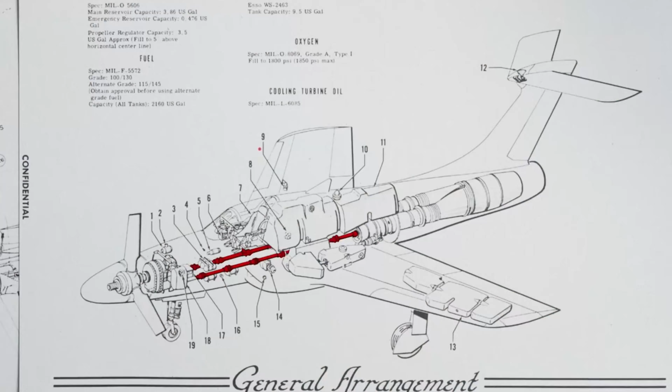The noise was so intense that it caused severe nausea and headaches, and in one documented case, triggered a seizure in an engineer exposed to its full force, powered by a massive 5,850 HP turboprop engine with afterburner capability.

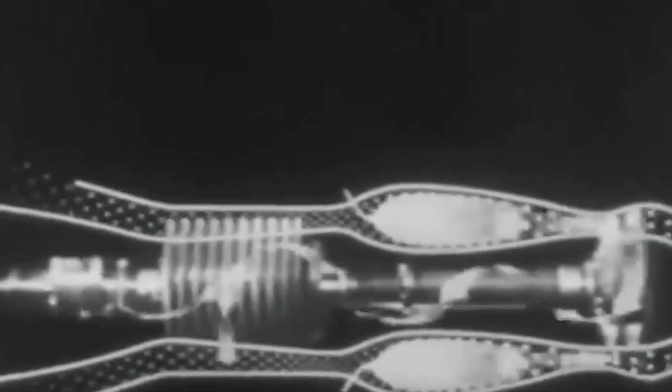The XF-84 represented an ambitious leap in aviation engineering. However, despite its impressive specifications and innovative design features, including a 12-foot diameter propeller with 3 steel blades, the aircraft's operational history was remarkably brief.

The 2 prototypes completed only 12 test flights, accumulating less than 7 hours of total flight time before the project's cancellation in 1956. This video will explore the fascinating engineering journey of the Thunderscreech, from its ambitious design goals to the technical challenges that ultimately led to its downfall.

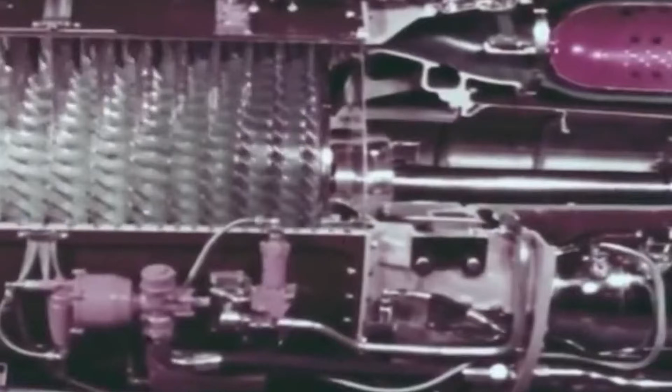The birth of the XF-84 Thunderscreech project. The 1950s marked an unprecedented period of aviation advancement as the industry emerged from World War II as the largest manufacturing sector in the United States.

During the 62 months between July 1940 and August 1945, American manufacturers produced nearly 300,000 aircraft, establishing a foundation for post-war innovation.

The aviation landscape underwent a significant transformation after World War II. The military services were reorganized in 1947, establishing the United States Air Force as a separate service. Furthermore, the industry faced mounting pressure to develop aircraft combining the emerging capabilities of jet engines with traditional propeller-driven benefits.

Republic Aviation launched Project 3347 in response to these evolving needs. Initially designated as the XF-106, the project was subsequently renamed to XF-84 to maintain its connection with the F-84F Thunderstreak lineage. The development marked a bold effort to design an aircraft capable of achieving several seemingly contradictory objectives, including jet-like performance, extended operational range, reduced fuel consumption, and lower landing speeds.

The project originated from a U.S. Navy requirement for a carrier-based fighter that could operate without catapult assistance. The Air Force's Wright Air Development Center became a key sponsor, recognizing the potential for a versatile aircraft that could serve multiple roles. The initial specifications called for an aircraft powered by a 5,850 HP Allison XT40-1 turboprop engine.

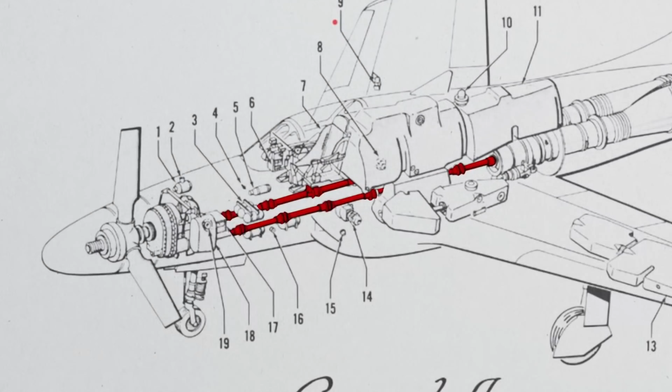Additionally, the design incorporated an afterburner capability that could increase power output to 7,230 HP. The engineering team faced the complex challenge of integrating these powerful components while maintaining stable flight characteristics.

The project's ambitious scope reflected the era's optimistic approach to technological advancement. Although the Navy initially ordered 3 prototypes, they subsequently canceled their participation, consequently transforming the remaining XF-84 prototypes into research aircraft for the Air Force's Propeller Laboratory at Wright-Patterson AFB.

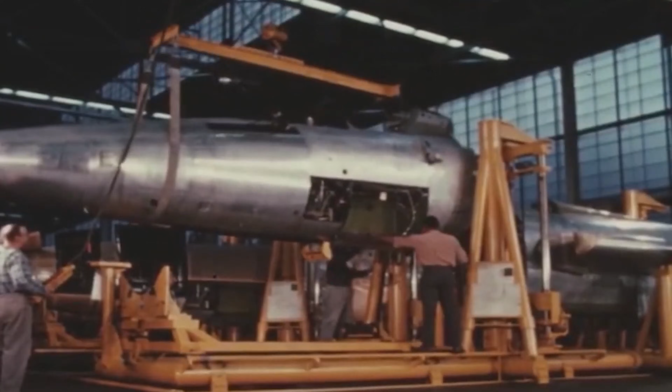Engineering marvel, the supersonic propeller design. First of all, the engineering team at Republic Aviation faced unprecedented challenges in designing a propeller that could operate efficiently at supersonic speeds. The resulting 3-bladed Aero Products propeller represented a significant advancement in aviation technology, specifically engineered to maintain stability at extreme velocities.

The engineering team created a robust propeller design with square-tipped steel blades spanning 12 feet, equivalent to 3.7 meters in diameter. These blades feature thin profiles optimized for supersonic speeds and were constructed from specialized high-strength steel capable of withstanding immense rotational forces, with a tensile strength rated at 180,000 pounds per square inch.

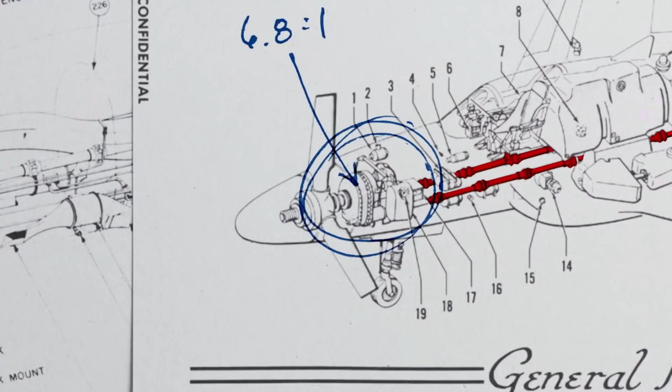The propeller's thrust control system operated through an innovative variable pitch mechanism. Accordingly, the blade pitch could be adjusted while maintaining a constant rotational speed of 2,100 rpm. This design choice enabled precise thrust control without altering the engine's power output.

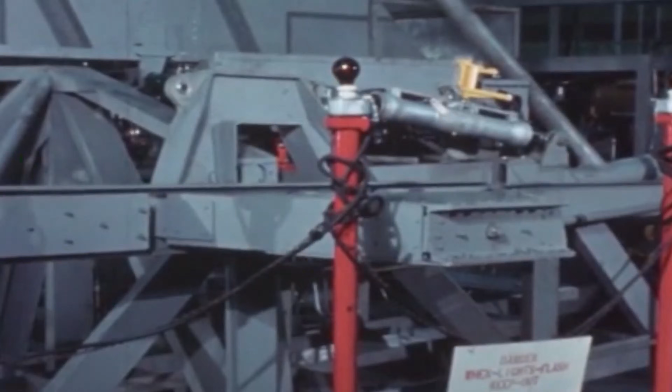The blade design demanded a precise balance among competing factors, guided by a specialized table of specifications. The blade tips were designed to achieve a velocity of Mach 1.18 to maximize thrust generation, while the chord design incorporated a wide chord, low aspect ratio configuration to ensure stability at supersonic speeds. Additionally, the blade profile featured extremely thin sections to minimize shock formation.

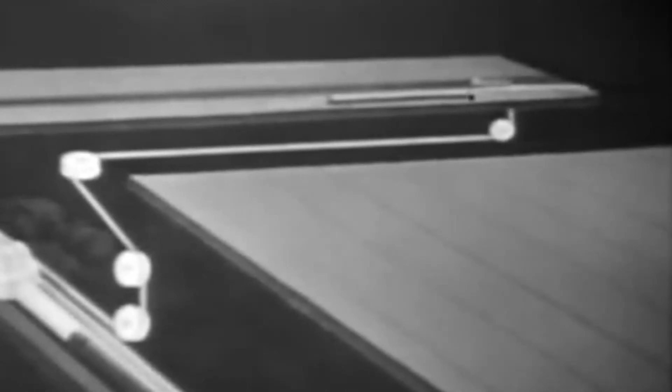Moreover, the engineering team incorporated advanced aerodynamic principles to address the challenges of supersonic propeller operation. The blade sections were designed to maintain optimal lift-drag ratios at high speeds. Therefore, each blade segment operated at carefully calculated angles to maximize efficiency while minimizing the formation of shock waves. The design process required extensive analysis of blade section, interference, and shock field interactions at supersonic speeds.

The engineering team achieved remarkable results, with theoretical calculations suggesting potential efficiency rates of 70% at tip Mach numbers reaching 2.3. Power system integration: at the heart of the XF-84H lay an innovative power system built around the Allison XT40-A-1 turboprop engine.

This power plant represented a significant departure from conventional designs, particularly in its unique configuration and integration challenges.

The XT40-A-1 engine represented a groundbreaking innovation in aviation propulsion, showcasing a revolutionary design that paired two T38 gas turbine power sections mounted side by side. This unique dual turbine configuration produced an extraordinary 5,850 shaft horsepower, positioning it as one of the most powerful engines of its time. Each T38 turbine was equipped with a highly efficient 19-stage axial flow compressor, contributing to the engine's remarkable performance capabilities.

Additionally, the XT40-A-1 delivered 1,296 pounds of jet thrust, while maintaining a total weight of 2,860 pounds, reflecting its sophisticated and efficient engineering. A particularly notable feature of this engine was its integrated afterburner capability, designed to further enhance its output to an impressive 7,400 horsepower. However, this feature, despite its potential, was never subjected to flight testing. The XT40-A-1 thus stood as a testament to advanced engineering, blending innovation and performance in a compact, high-powered design.

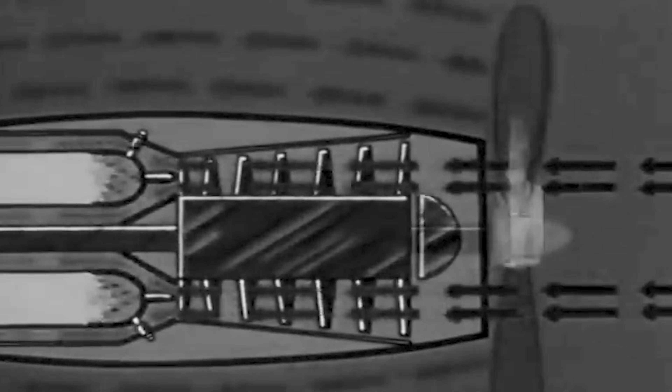The power system's integration challenges ultimately proved insurmountable. The combination of mechanical difficulties with the prop pitch gearing and severe vibrations generated by the lengthy propeller shafts led to persistent reliability issues. These technical hurdles, rather than any single catastrophic failure, contributed significantly to the project's eventual termination.

Technical specifications and performance. The Republic XF-84H Thunderscreech represented a remarkable combination of size and power specifications that set it apart from conventional aircraft of its era. First of all, the aircraft's physical dimensions were carefully engineered to balance performance with practical operational requirements. The XF-84 was a sizable aircraft, with a length of 51 feet 5 inches, a wingspan of 33 feet 5 inches, and a height of 15 feet 4 inches.

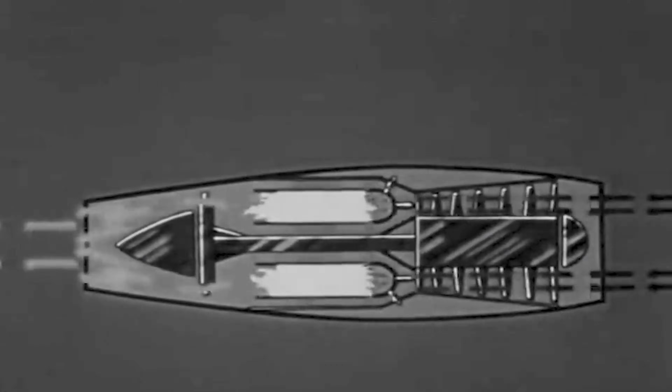Its wing area measured 331.0 square feet, providing ample surface area for lift generation. Notwithstanding its substantial size, the aircraft maintained a relatively efficient weight distribution. The empty weight stood at 17,892 pounds, as a result of careful material selection and structural engineering. At maximum capacity, the gross weight reached 27,046 pounds.

The speed and altitude capabilities of the XF-84 reflected a blend of ambition and compromise, as its actual performance did not fully align with its designers' lofty expectations. Republic Aviation initially predicted a maximum speed of 670 miles per hour, which would have secured its position as the fastest propeller-driven aircraft ever constructed. However, real-world performance testing revealed a maximum speed of 520 miles per hour, falling significantly short of that anticipated figure. This discrepancy highlighted the challenges of pushing the boundaries of propeller-driven flight at near transonic speeds.

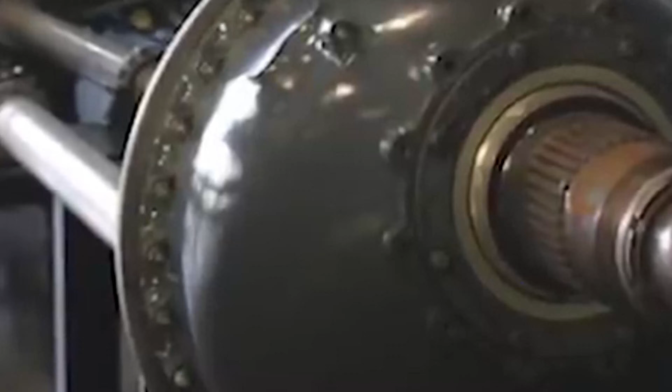While its speed capabilities were underwhelming, the XF-84 demonstrated noteworthy performance in terms of altitude. It achieved a service ceiling of 40,000 feet, showcasing its ability to operate effectively at high altitudes. Additionally, the aircraft boasted a robust rate of climb, capable of ascending 5,000 feet per minute, underscoring its impressive vertical performance. These attributes reflected the advanced engineering that went into its design, even if the aircraft did not achieve the groundbreaking speeds originally envisioned.

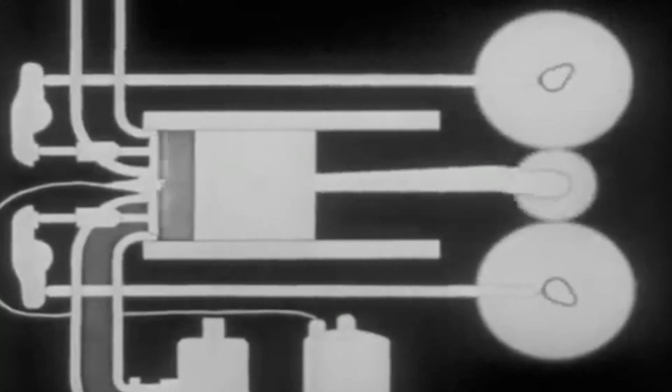The XF-84's operational range exceeded 2,000 miles, marking a significant achievement in terms of fuel efficiency for its era. This extended range capability aligned with the original project goal of combining jet fighter performance with propeller-driven efficiency. The Allison XT40-A-1 turboprop engine, rated at 5,850 horsepower, theoretically offered the potential for increased power output to 7,400 HP with afterburner engagement. Ultimately, the afterburner capability remained untested during flight operations, leaving questions about potential performance improvements unanswered.

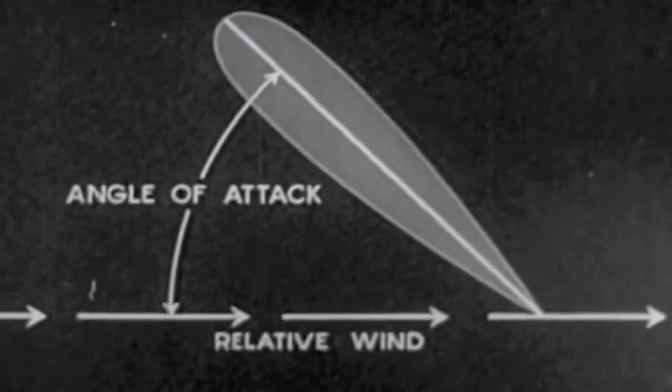The thrust-to-weight ratio of 0.66 highlighted the aircraft's unique position between conventional propeller-driven aircraft and pure jet fighters. This characteristic underscored the experimental nature of the project and its attempt to bridge the gap between traditional and emerging aviation technologies.

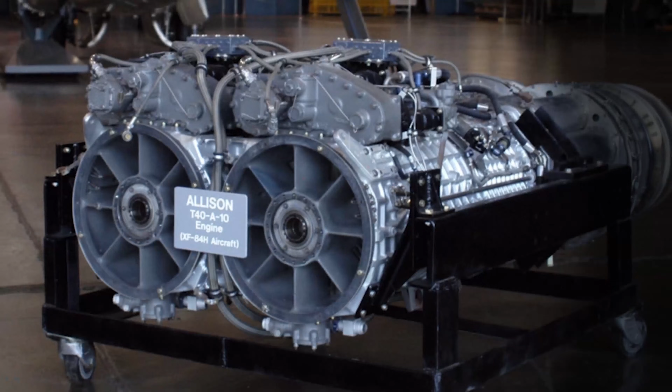The Republic XF-84's most distinctive characteristic was its extraordinary sound generation capabilities. The aircraft's unique acoustic signature stemmed from its revolutionary propeller design, which created unprecedented sound phenomena in aviation history.

The supersonic propeller tips, rotating at Mach 1.18, generated a continuous sonic boom that radiated laterally from the propellers for hundreds of yards. The outer 24 to 30 inches of the propeller blades maintained supersonic speeds even during idle thrust. The constant supersonic rotation of the propeller generated a distinctive sound pattern, characterized by lateral radiation from the blades.

This powerful noise was audible over an impressive range, reaching up to 25 miles. The propeller tips reached speeds of Mach 1.18, with the outer 61 to 76 centimeters of the blades operating in the supersonic range. This combination of speed and sound propagation contributed to the aircraft's highly unique acoustic signature.

In addition to the primary sonic boom, the aircraft generated complex sound patterns from multiple sources. Notably, no official decibel measurements were ever recorded.

As test pilot Henry Beaird remarked, "Nobody ever actually recorded the decibels. I think they were afraid the measuring device might get broken."

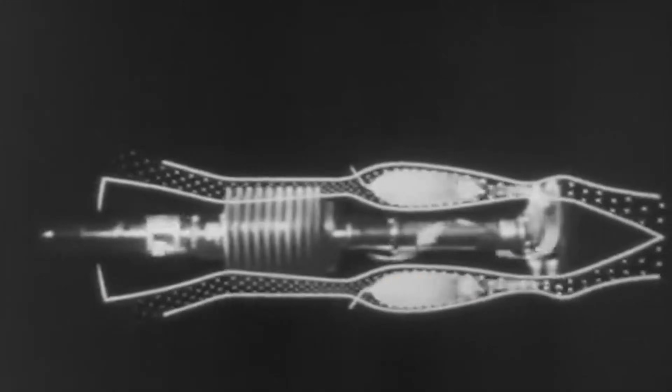The sound intensity of the aircraft was driven by three main factors: the shock waves produced by the supersonic propeller tips, the noise generated by the subsonic sections of the blades, and the combined sound output from the dual turbine sections. The sound effects on ground personnel were so severe that they necessitated substantial operational adjustments.

The intense noise caused physical issues such as severe nausea and headaches among ground crews, with some individuals even experiencing seizures due to prolonged exposure.

The vibrations generated by the sound posed a risk of damaging sensitive control tower components, while the overwhelming noise made it impossible to maintain standard communication protocols.

The sound intensity became so problematic that Edwards Air Force Base implemented extraordinary measures. Base personnel resorted to using signal flags and lights for communication.

Ultimately, after numerous complaints, the Air Force Flight Test Center mandated the aircraft's relocation to Rogers Dry Lake, far from the flight line, for engine testing.

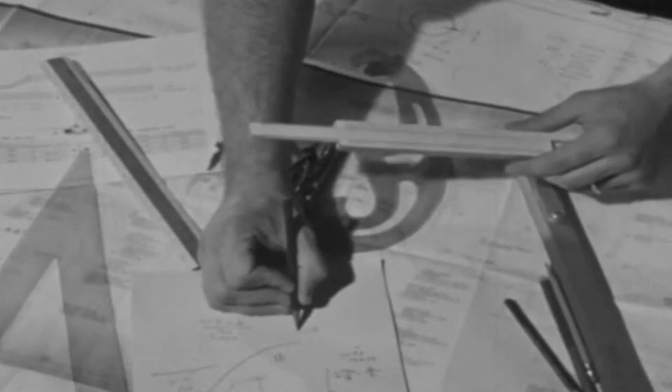One particularly notable incident involved a C-47 crew chief who was severely incapacitated during a 30-minute ground run while inside his aircraft. The shock waves proved powerful enough to physically knock down personnel who ventured too close to the propeller's plane of rotation.

The sound phenomenon fundamentally altered standard operating procedures at Edwards AFB. The control tower staff faced potential damage to sensitive equipment, forcing them to develop alternative communication methods with ground crews. This unprecedented situation highlighted the practical limitations of operating such an acoustically intense aircraft within standard military facilities.

The flight testing program of the XF-84 began after its transportation via rail from Republic's Farmingdale plant to Edwards Air Force Base. The program would ultimately prove to be one of the shortest yet most eventful in experimental aircraft history. Ground testing revealed immediate challenges that would plague the entire program.

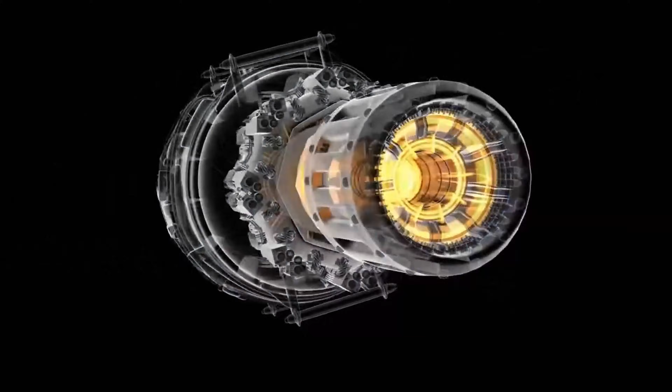The aircraft required an extensive 30-minute warm-up period before each flight, creating significant operational limitations. The ground crews faced unprecedented difficulties, primarily due to the intense sonic effects that disrupted normal base operations.

The XF-84 made its historic first flight on July 22, 1955, marking the beginning of an ambitious testing program. Throughout the testing phase, a total of 12 flights were conducted, accumulating 6 hours and 40 minutes of flight time.

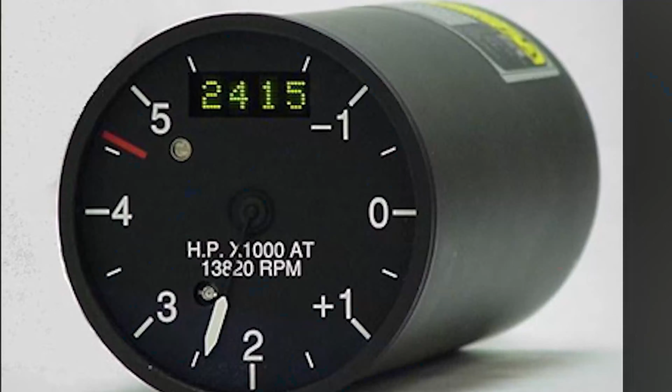However, despite the aircraft's potential, the results were far from ideal. Out of the 12 flights, only one was considered a complete success, illustrating the significant challenges faced by the testing team. The two prototypes had different flight distributions, with Prototype 1 completing 8 flights and Prototype 2 finishing 4.

The testing phase uncovered some critical issues that severely hindered the aircraft's performance. One of the major problems was persistent mechanical failures in the propeller pitch gearing, which directly impacted the aircraft's ability to maintain stable performance. Additionally, the XF-84 suffered from severe airframe vibrations that further complicated its handling and reliability.

Frequent engine malfunctions also plagued the aircraft, preventing it from reaching its full potential during flight. Lastly, the aircraft exhibited unstable longitudinal control.

These challenges made the aircraft difficult to manage and navigate under certain conditions, highlighting the difficulties in achieving the ambitious design goals set for the XF-84 despite its groundbreaking engineering.

Two test pilots, Hank Beard and Lin Hendrix, undertook the challenging task of flying the Thunderscreech. Beard conducted 11 of the 12 test flights, yet 10 of his flights concluded with forced landings.

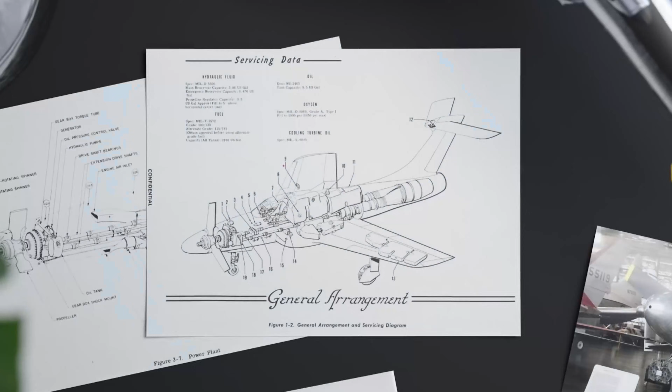The aircraft's performance limitations became evident when it demonstrated an unhappy practice of snaking at speeds above 450 knots, indicating serious longitudinal stability issues.

Lin Hendrix' experience proved notably dramatic. After his single flight attempt, he famously declared to Republic's chief engineer, 'You aren't big enough, and there aren't enough of you to get me in that thing again.' His refusal to conduct further flights stemmed from the aircraft's dangerous handling characteristics at higher speeds.

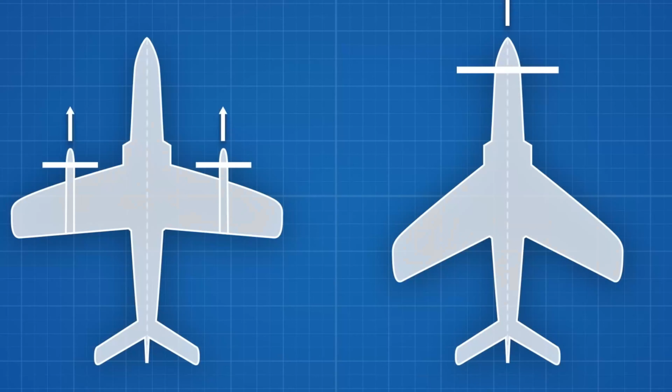The testing program never progressed beyond the manufacturer's phase of approving flights. The Air Force Flight Test Center, recognizing the mounting technical challenges, directed Republic to conduct engine runs far from the flight line on Rogers Dry Lake.

Yet these precautions did little to salvage the program's viability. The combination of mechanical failures, control issues, and operational impracticality led to the program's termination in September 1956. The aircraft's inability to reach its design speeds, coupled with persistent stability problems, demonstrated that the ambitious concept of a supersonic propeller-driven fighter had reached its practical limits.

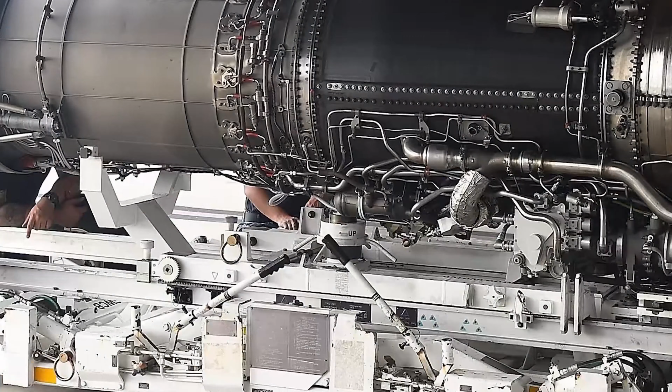Throughout the XF-84's development, Republic Aviation implemented numerous engineering modifications to address the aircraft's inherent challenges. These changes ranged from fundamental structural alterations to innovative system implementations, each aimed at improving the aircraft's performance and operational capabilities. The engineering team made several critical modifications to counter the intense torque generated by the supersonic propeller.

Notably, they raised the horizontal tail surfaces to a position atop the tail fin, ensuring clearance from the devastating prop wash effects. A distinctive triangular shark fin was installed behind the cockpit to enhance stability during flight operations.

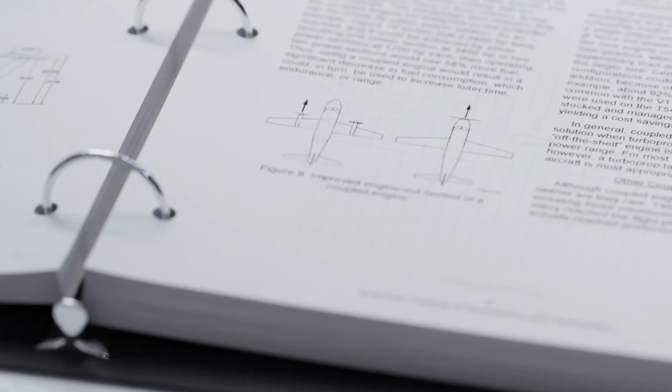Several structural modifications were made to address the aircraft's performance issues. The left leading edge intake was extended 12 inches forward compared to the right side to improve airflow and balance. Additionally, differential operation capabilities were introduced for the left and right flaps, allowing for more precise control. To further enhance the aircraft's stability and handling, a T-tail configuration was implemented, providing improved control surfaces.

Efforts to reduce the aircraft's notorious noise issues were a primary focus for engineers, who implemented a series of strategies aimed at mitigating the acoustic impact. One of the most significant areas of modification was engine placement, to minimize the disruptive effects on ground personnel and surrounding infrastructure. While this modification did help reduce some of the noise experienced on the ground, its success was limited, as the aircraft still produced a substantial sound level during operation.

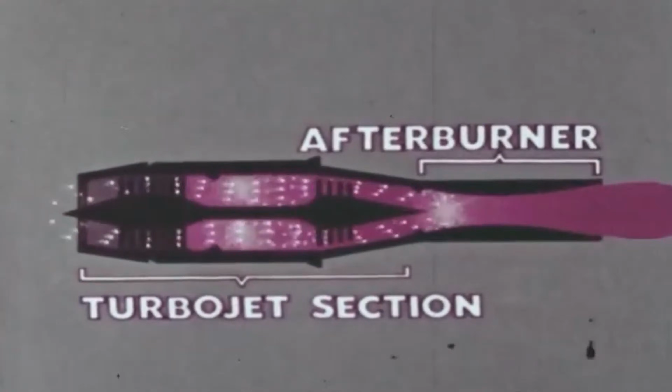In addition, efforts were made to reduce base disruption by relocating the aircraft's operations to Rogers Dry Lake, a more remote area that allowed for flight testing with less impact on populated regions. While this move helped lessen the effects on the immediate surroundings, it did not fully resolve the noise problem.

Another key aspect of the noise reduction strategy involved optimizing the blade configuration to improve the sonic characteristics of the propeller. Engineers tested multiple designs in an attempt to refine the blade's shape and minimize the intense noise generated by supersonic rotation. Despite these efforts, the aircraft continued to present significant challenges in achieving a level of noise control that would make it suitable for regular operation.

The engineering team introduced several innovative features to enhance the aircraft's capabilities. Among these was the pioneering implementation of a retractable ram-air turbine designed to deploy automatically whenever the landing gear extended. This system proved invaluable, providing crucial electrical and hydraulic power during the frequent engine failures that plagued the aircraft.

Meanwhile, the integration of an afterburner system aimed to boost the engine's output from 5,850 HP to 7,400 HP. This modification, theoretically, would have enabled supersonic flight with the propeller in a feathered position. Ultimately, the program concluded before the afterburner could be tested in flight.

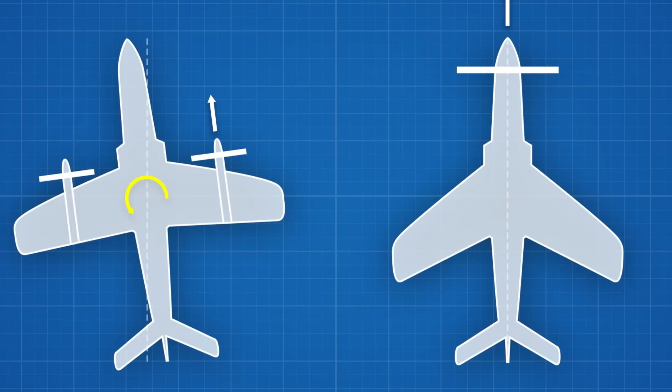The engineering team tackled multiple mechanical challenges concurrently, focusing on improving key systems. In the case of the propeller pitch control system, they implemented advanced gearing mechanisms and modified the control systems to enhance reliability. Additionally, safety features were incorporated to better handle emergencies, ensuring the aircraft could be managed in critical scenarios.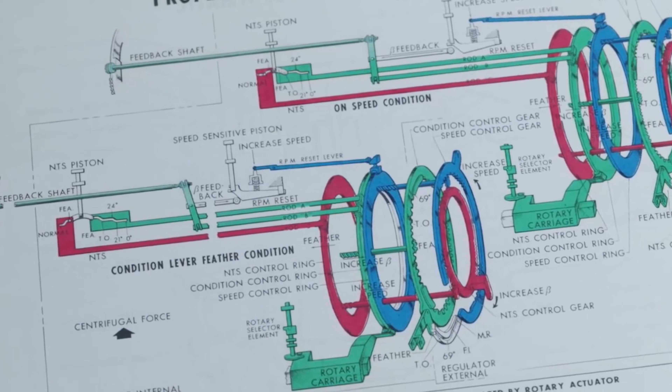Meanwhile, the drive system underwent significant modifications, including reinforcing the 18-foot-long propeller shafts and refining the gearbox design.

The modifications, while innovative, faced persistent challenges. The aircraft continued experiencing severe vibrations at speeds exceeding 450 mph. These vibrations, originating from the propeller shafts, created cascading effects throughout the airframe. The engineering team's efforts to resolve these issues through structural reinforcement and system optimizations proved insufficient to overcome the fundamental design limitations.

The extensive modifications required for operational capability highlighted the project's inherent complexities. Each improvement attempt revealed new challenges, creating a cycle of continuous engineering adjustments.

The aircraft's mechanical difficulties persisted, with 11 out of its 12 test flights ending in engine failures, underscoring the limitations of the available technology and engineering solutions of that era.

Project termination and lessons learned. In September 1956, the United States Air Force officially terminated the XF-84 Thunderscreech program, marking the end of an ambitious yet troubled chapter in aviation history. The project's conclusion stemmed from a combination of insurmountable technical challenges and operational limitations that proved too significant to overcome.

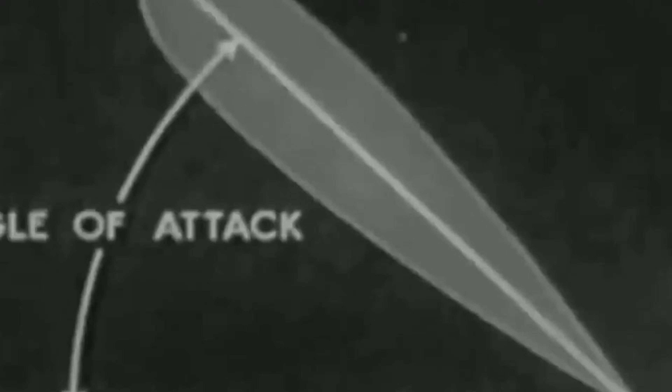The operational assessment of the XF-84 revealed substantial drawbacks that outweighed its potential benefits. Primarily, the aircraft's extensive maintenance requirements and poor reliability made it impractical for military service. Several factors led to the aircraft's unfavorable evaluation. The extended preparation time, which conflicted with the need for rapid deployment, proved to be a significant drawback.

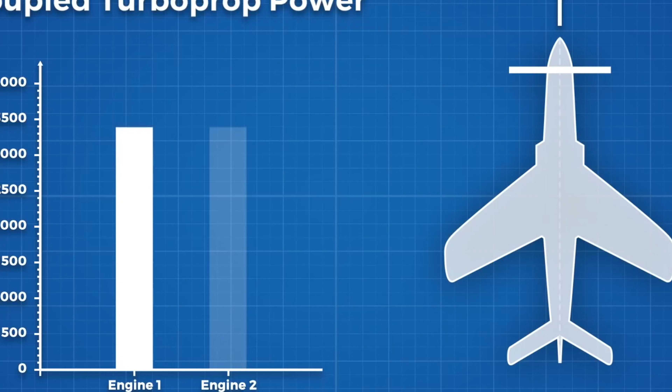Additionally, the high maintenance demands placed a strain on operational costs, as frequent repairs were necessary due to persistent mechanical issues. Furthermore, safety concerns for ground personnel, stemming from the aircraft's intense noise and vibrations, limited its operational flexibility and further hindered its practicality in real-world scenarios.

Notably, the XF-84's project, despite its shortcomings, contributed valuable insights to aviation technology. The program led to several significant advancements in aviation technology. It marked the first use of a ram air turbine system on an aircraft, a pioneering development at the time. The advanced air brake design, developed for the XF-84, was later adapted for use on the F-105 Thunderchief, contributing to improved performance in subsequent aircraft.

Additionally, the program provided groundbreaking research in supersonic propeller technology, offering valuable insights into the challenges of operating at such high speeds. The program also generated crucial data on noise suppression and vibration control, which would influence future aircraft designs and operational strategies. Undeniably, the project's technical challenges provided crucial lessons for future aircraft development. The engineering team's experience with supersonic propeller design and noise management informed subsequent aviation projects.

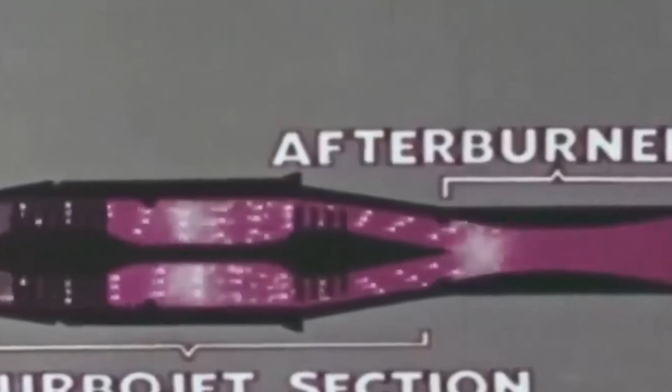The aircraft's limitations demonstrated the practical boundaries of propeller-driven fighter technology. The program's termination influenced the Pentagon's strategic direction as they permanently moved away from propeller-driven fighters. This decisive shift toward jet propulsion marked a turning point in military aviation development. The XF-84's legacy serves as a reminder that innovation often comes at the cost of practical limitations and unforeseen challenges.

The conclusion of the project provided valuable engineering insights into several critical areas. It highlighted the limitations of propeller design at supersonic speeds, revealing the challenges in optimizing performance at such high velocities. The project also underscored the structural requirements for installing high-power turboprop systems, offering a deeper understanding of the stresses and demands placed on the airframe.

Additionally, it contributed to the knowledge of noise and vibration management in high-performance aircraft, addressing the need for effective control in such environments. Finally, the project shed light on the integration challenges associated with complex power transmission systems, offering important lessons for future aircraft designs.

Republic Aviation's chief engineer characterized the XT-40 engine as a monstrosity, a mechanical nightmare, reflecting the fundamental challenges faced in pushing the boundaries of propeller-driven technology. The XF-84's development cycle demonstrated that theoretical possibilities do not always translate into practical applications, particularly when operational requirements demand reliability and ease of maintenance.

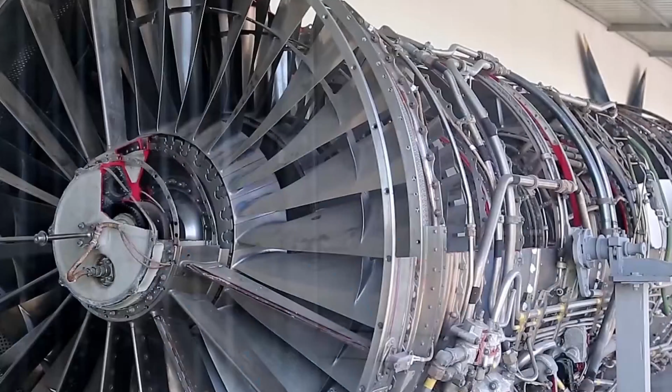The Republic XF-84 Thunderscreech is a fascinating example of 1950s aviation ambition. Designed to break barriers with its supersonic propeller, it ultimately became infamous for its overwhelming noise and relentless mechanical failures, forcing its early retirement after just 12 flights. Though it never succeeded as a fighter, its pioneering innovations, like the first ram air turbine system, left a lasting mark on future aircraft design.